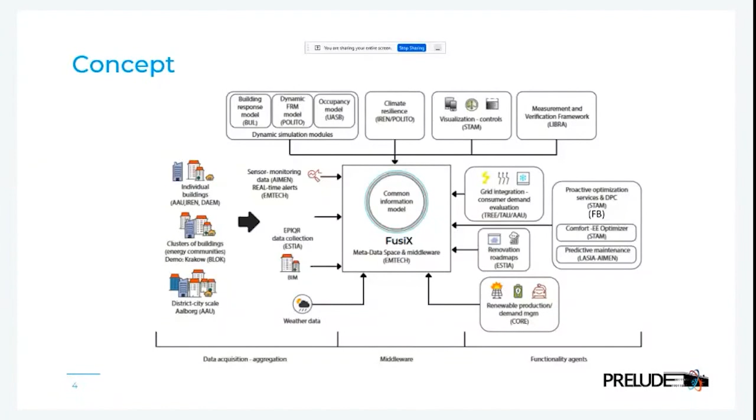Today, the focus area is on proactiveness, forecasting, and optimization. And as Giacomo has said, we will hear 5 exciting presentations. One of them will come from POLITO, which will be about white box models, the free running concept for the building, and 24-hour forecasting of comfort condition in the building that is supported by these models. The other presentation will be given by Treelogic, which is about aggregation of the data and upscaling of the models.

The third presentation will be given, maybe not in that order, by STAM, which is about their platform and concept for energy efficiency improvement in buildings, big savings, and also one from Forschung Burgenland, which will focus on data predictive control of buildings. And then one more presentation will be given by CORE, which is working on prediction of weather conditions and also energy balance condition in the building. I think I have captured all of the presentations that will be given here.

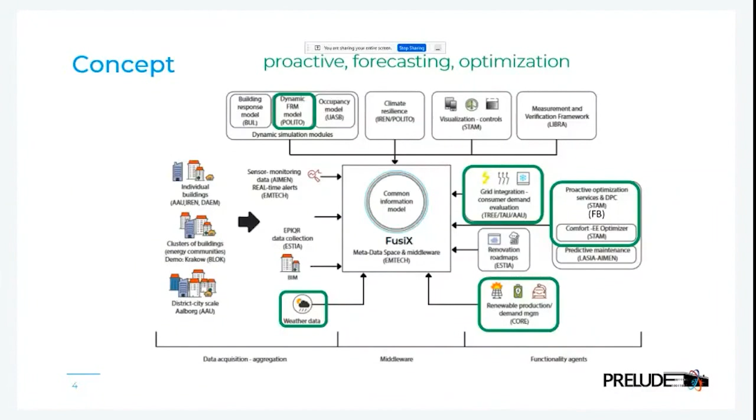This is not very efficient, and this is maybe not the favorite situation for the building owner or the tenant, where you have several technology providers every time separately contacting the building.

Therefore, in our project, we have replaced this configuration with a central solution for the middleware, which is called FusiX, which can serve a data transfer between the building and different technology providers, and is bridging the data from one to another. It can also bridge the data from one technology provider to another, so the data is more easily accessible by each partner in the project.

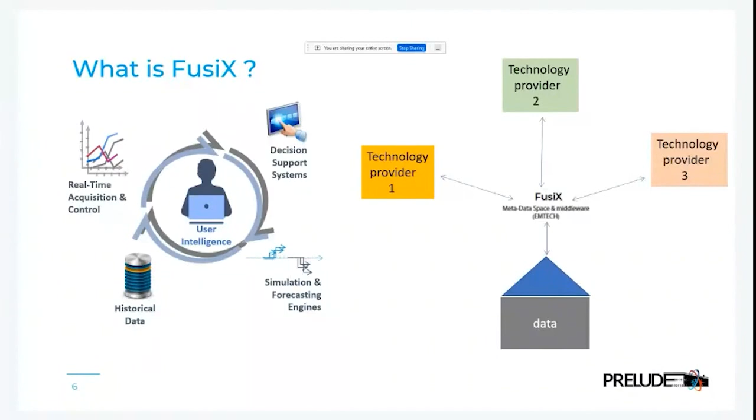On top of that, FusiX not only acts as a middleware, it can also aggregate data from various technological level buildings. It can integrate simulation and forecasting technologies. So this means it can integrate all of these technology providers that provide this kind of solution. Generally, it can enhance intelligence. In some cases, it can schedule and run simulations.

And it can as well provide the feedback in form of some kind of dashboards and proactive graphical interfaces to the end users. It can also control the signals to the building if the building allows that communication.

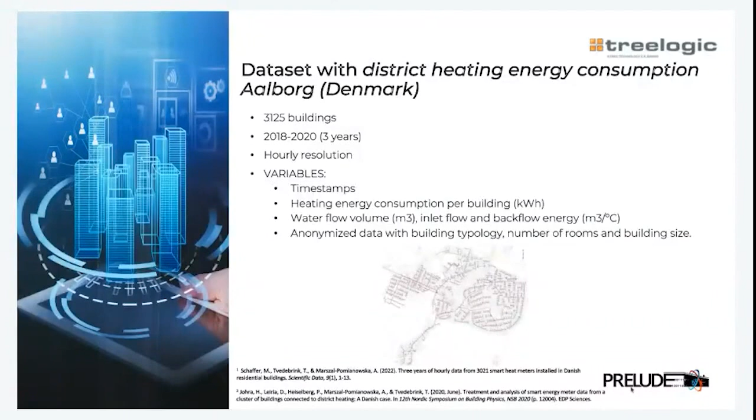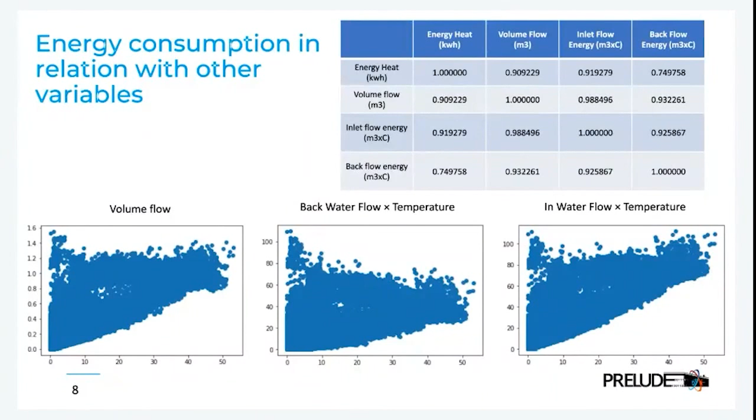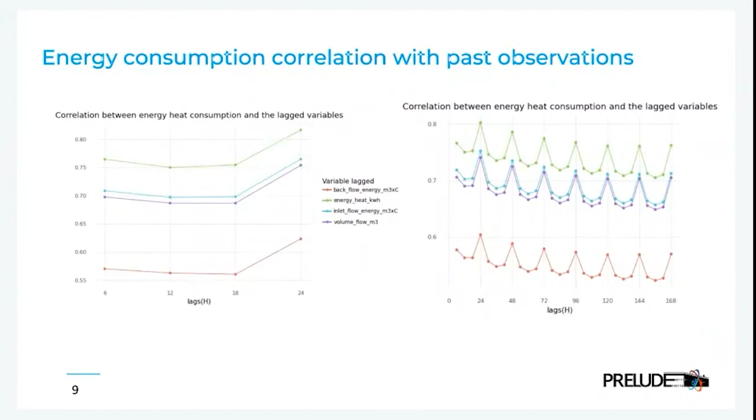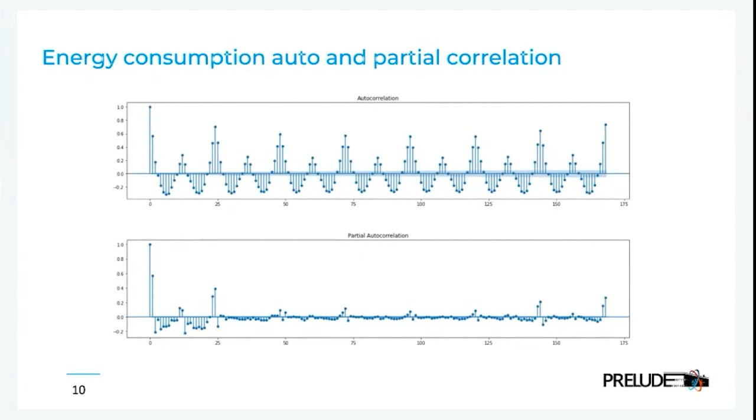In my opinion, it's also important to highlight the technologies that we are using here to perform either the exploratory data analysis or to train and test our forecasting models. We are mainly relying on Python as a programming language, and we are not limited only to these three important libraries that we are using: sklearn, XGBoost, and HyperOpt.

We are also using AWS, Amazon Web Services, such as S3 for storage and SageMaker for the notebooks, and Elastic Compute Cloud or EC2 service in order to instantiate and make the forecasting. As it's an ongoing work, we will potentially be using Spark and Elastic MapReduce to have a faster response from the models.

And now, before diving deep into the aggregation methods details, let's set our baseline model. For the baseline model, we chose a monolithic model for district level forecasting. We'll be using the Aalborg dataset that we presented before, and the idea here is to make a model whose output will be a 24 hours ahead forecast of the district heating energy consumption, and it will use as input the variables that we have mentioned before, of course after performing a feature selection process.

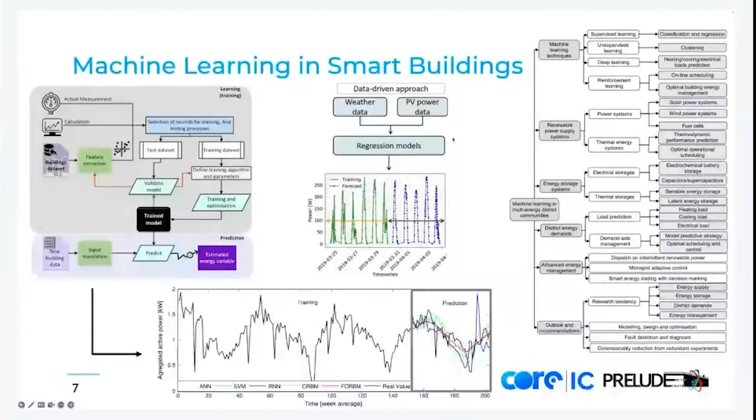Okay, so in more detail about the PRELUDE project, we acquired some data from the Living Lab Energetikum, which is located in Pinkafeld in Austria. The available data for good modeling till now is about 1 year, with a resolution of 15 minutes. The sampling frequency of the time series is 15 minutes.

And before modeling, we have implemented a data pre-processing procedure where we clean the data, removed the missing values or values that are not reasonable, and then also we excluded some outliers of the data, etc. Also, we resampled the data to hourly resolution because our goal is to make a forecast 24 hours ahead, for example, for the weather data or for the energy consumption and PV power generation.

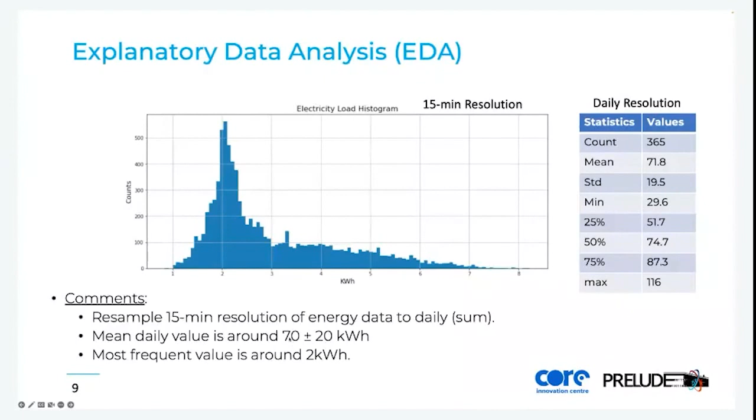So here you can see a histogram of electricity with the 15 minutes resolution, where you can see the peak around 2 kilowatt hours, which is the most frequent value. And also the mean daily total value, which is not depicted here, is about 70 plus minus 20 kilowatt hours.

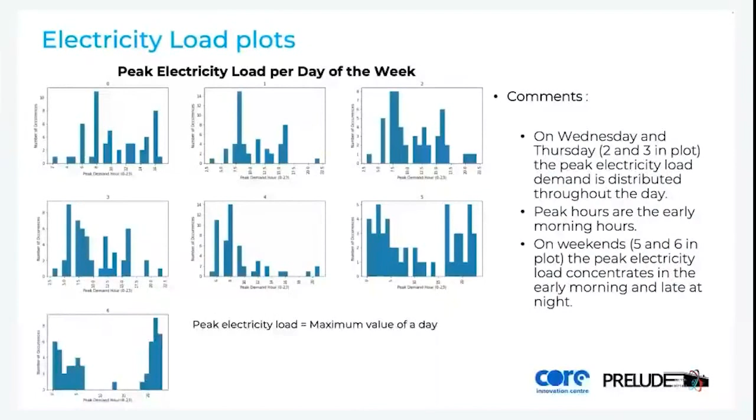Also here about the peak electricity load per day of the week, you can see that for all days there is no specific pattern during the day, so this may be a difficulty for us to make some predictions in the future. Also, you can see here per month, from which we can conclude the same, meaning that the month is not playing a very crucial role in the forecasting of the electricity consumption, because during the year the building is used equally.

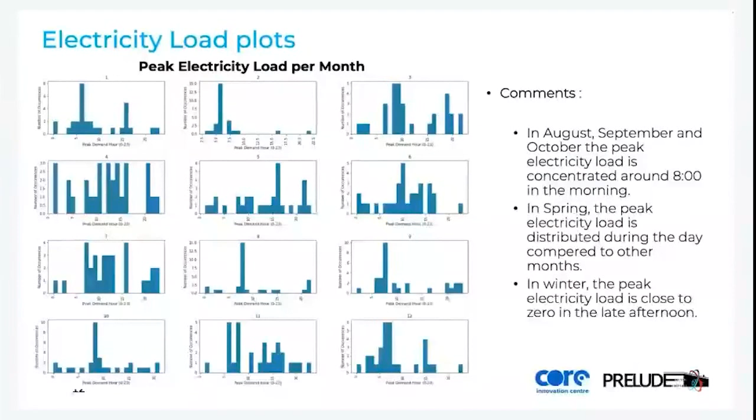So here, for the data about the production of electricity, we have an example of 3 months of the production of electricity from photovoltaics and the global radiation. The key here is that the variable that drives and helps to forecast the production of electricity in a 24-hour horizon is the global radiation, which is very obvious here because this is the variable that produces the electricity.

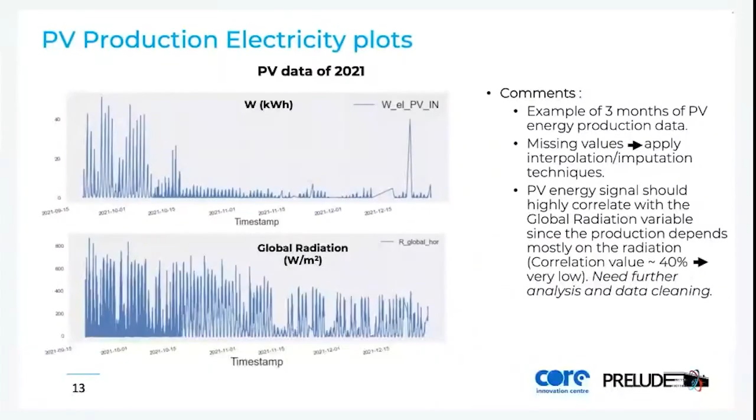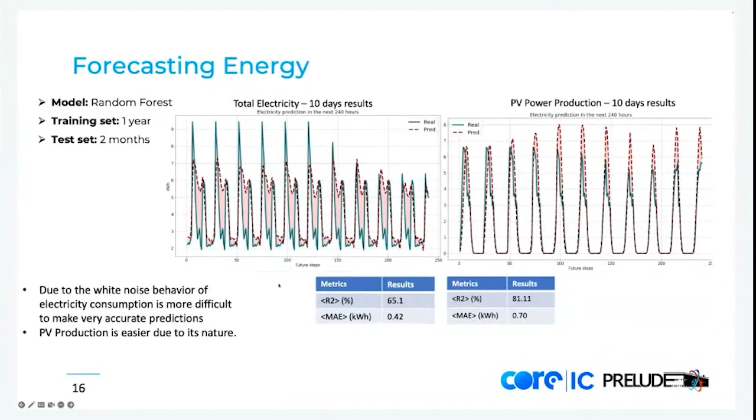But here, this result may be misleading. The crucial part is the mean absolute error for both variables, where on average we achieved about 0.7 kilowatt hours mean absolute error, and in the case of electricity consumption about 0.4 kilowatt hours for a test set of 2 months. So that's all for our part in the forecasting models in the PRELUDE project.

So some conclusions from this presentation are that machine learning algorithms are the most contemporary way of time series forecasting. Also, there is a plethora of applications, as you maybe already know or saw today, in the energy sector. One part of this is the forecasting of energy consumption and PV generation. Also, the manipulation and processing of time series can be quite challenging because most of the time the nature of a time series can reveal the power of predictability, as you can see in the case of electricity consumption, which was white noise, and this includes randomness in the time series.

And finally, the main challenge to deal with in time series is the forecasting horizon. So the longer the horizon, the more difficult it is to make accurate predictions for the ML models. So I think this is what you should keep.

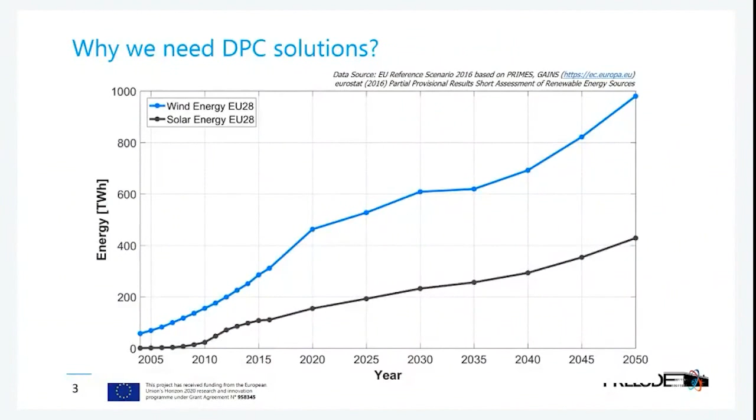If we talk about our energy strategy in the European Union, we have a cascaded utilization of activities. In the first step, energy saving, of course. In the second step, the direct use of electricity, especially from PV and wind energy. So in the future we have a more volatile energy supply system based on PV plants and wind power plants. For these reasons, we need a more intelligent control strategy on the demand side, offering more demand side flexibility from the user side.

We also have to offer flexibility so that we have a more grid-friendly operation, so that the grid will have a better solution for the future. For these reasons, we have to develop intelligent sector coupling technology. That means we should use more electricity, especially for e-mobility, and of course for power to heat and power to cool solutions.

The main advantage is that all this technology is available at the moment. We don't have to wait; batteries are available, heat pumps are available. We have the solutions for communication and for sensors. We only have to put it all together in an intelligent way so that we can align the energy production to the demand side. And this is where data-driven predictive control can especially help us.

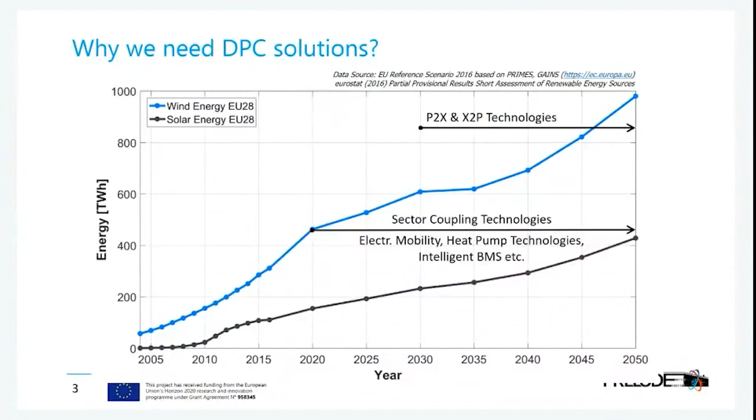What are the main advantages of a DPC, a data predictive control algorithm? With a data predictive control algorithm, we have the possibility to do peak shaving and load shifting. That means we can, for example, also ensure a power limit. We also have the possibility to optimize the runtime or the turn-off time.

We also have the possibility to better exploit solar gains. For example, if we not only use the DPC controller for the heat pump or for the charging control of the batteries, but also for an active shading system, then we can use the solar gains directly for heating, so that we can avoid additional heating energy demand during the transition period between winter and summer. This is also a really, really important topic.

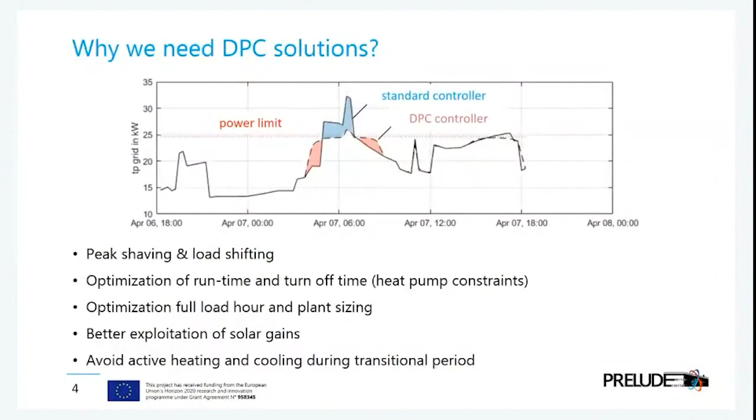And the question is, how does it work and how can we construct a DPC solution? Here it is really important to understand what state space modeling is, and on the other side, how we can optimize the future trajectories of the different actuators which we can control. For example, the switch on-off situation of a heat pump or the change of the hydraulic valves, etc. And for these reasons, I would like to start with a first step. What is a data-driven state space model?

We need a model which is able to predict, for example, if we apply the DPC controller for a zone, the room temperature. We know if we have a building, then the room temperature depends on the energy which we feed in via heating in a zone, in a room, but the temperature in a room is also dependent on the inner loads. For example, if we have a lot of PCs, then of course the inner load also increases the temperature level in the rooms. Then we also have inner loads from the occupants. Everyone gives off about 80 watts when sitting. So we also have an increase of the temperature based on these inner loads from occupants.

Then we also have solar radiation, solar gains, which heat up the rooms, especially over the summer months. And for these reasons, in a state space model we have to analyze not only the energy which we feed in by heating, or which we extract by cooling over the summer season, we also have to consider all the different loads which can occur, especially the solar loads if we use large glass fronts in our building. And especially if we have a lot of people in a building, then we also have to include the heat production by the occupants. This is the one side.

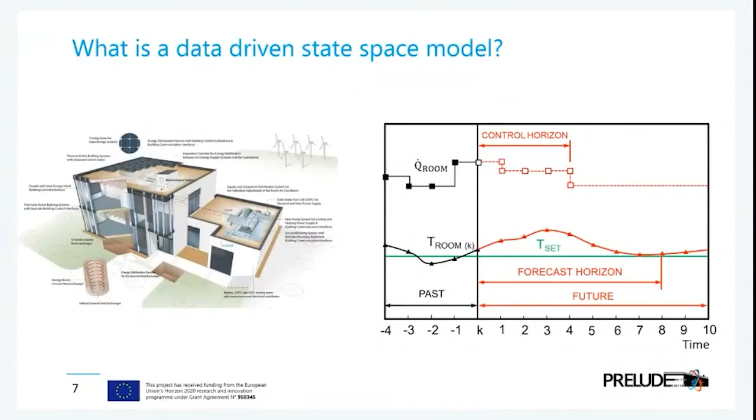That means we need, in a first step, a model which is able to predict the room temperature in dependence of all these additional boundary conditions, and with consideration of the future development of the weather condition, of course, also with the future development of the occupancy. So we need also occupancy modeling so that we know in the next 24 hours, for example, how many people are in the room, are in the building, etc.

And what we have also to analyze is, on the one side, as I mentioned before, to modify, to adapt, to adjust the energy consumption in such a way that we can better integrate renewables, but also we have to consider the room temperature in such way that we can offer with the building optimal thermal comfort.

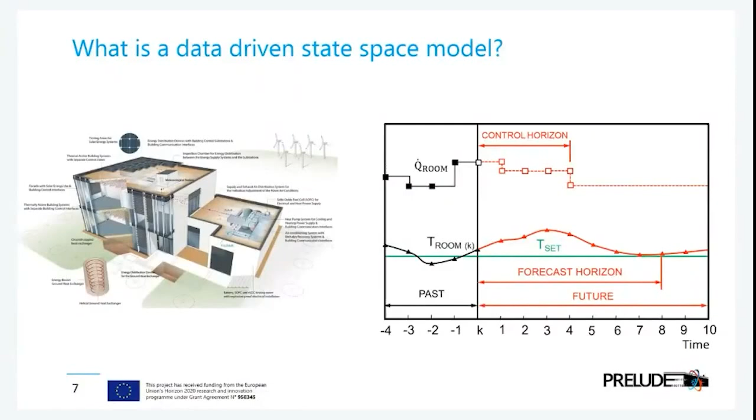So that means the state space model offers us connectivity between the energy which I feed in a building with future trajectories, and on the other side we receive information how, based on this energy which we feed in the different zones, the room temperature will change. But there are a lot of different possibilities how we can derive such a state space model.

We can use, for example, a black box model. It's a full machine learning algorithm. We can also use a white box model. That means we use a building simulation system and the building simulation model, and based on the building physics information and the weather data, we can also simulate the thermodynamical behavior of a building. But there is also a possibility between both approaches, and this approach is called gray box model.

The gray box model is a mixture between a physical model and a data-driven approach, and this gray box model is generally based on the first law of thermodynamics. So that means we can use the first law of thermodynamics, and based on it, we can derive, based on different model structures, a state space model.

And in a first step, it is really important to analyze which building we have. For example, if we have a building with a large glazed facade, then we have also to consider in the model structure the solar gains, the solar loads. If we have a building with a ventilation system, then we have also to include the energy feed in and extraction by the ventilation system. If we have a building with a lot of people in there, then we have also to consider the inner loads based on the occupants, etc.

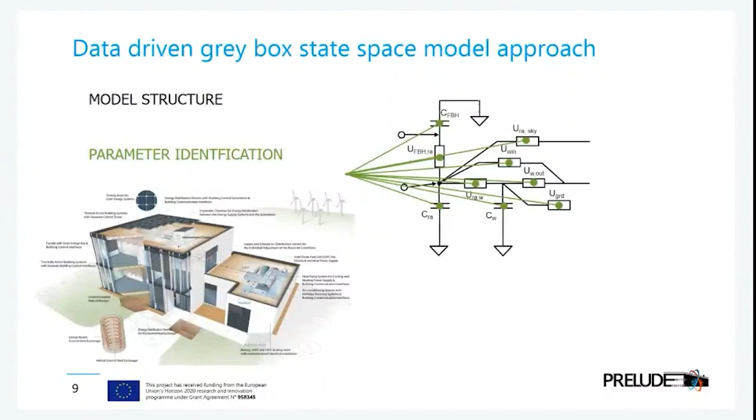But really important is we should use here a model structure which is based on a linear ODE. The main advantage is, based on the linear ODE, we have the possibility to discretize this ODE in such a way that we receive a linear set of equations.

And then we can derive, based on this linear set of equations, the constants, the matrix constants, in such way that we can better integrate it in the optimization algorithm. Of course, there are two possibilities.

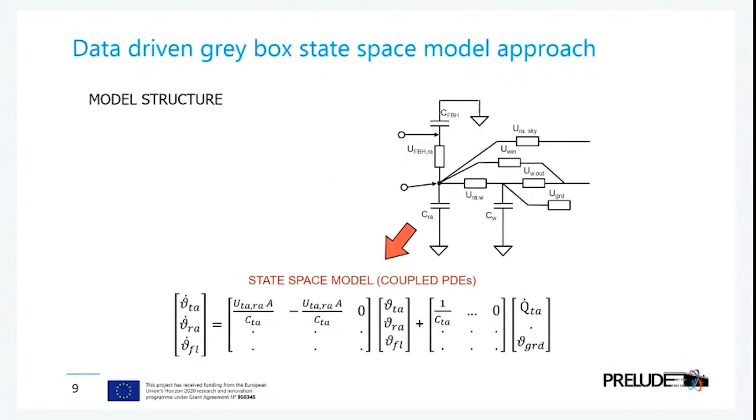We can use the standard state space model discretization, but if we use a standard approach, then we receive nonlinear equations, for example, if we consider the solar loads, etc. And then we can only use nonlinear optimization algorithm.

And if we would like to optimize a lot of different trajectories for the actuators, for the valves, for example, for the shading position, etc., then we have a big issue, because nonlinear optimization algorithms have problems here to find the global minimum.

For these reasons, we use here source terms, which include in an explicit manner the nonlinear terms, for example, the solar loads, etc. And then you can derive here a set of linear equations. And this is a really, really good basis for the optimization algorithm and to apply, for example, a solver-based optimization.

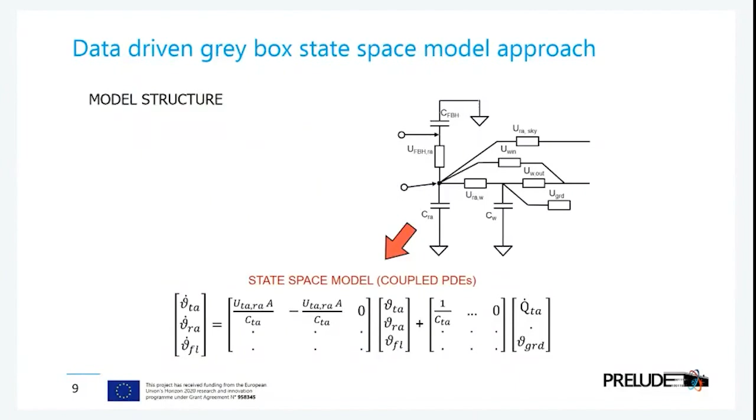So if we have this state space model, then we can put it together with the mentioned optimization algorithm in such way that we can construct a DPC controller. In a first step, as I mentioned before, it is really important to analyze the building in which we would like to integrate a DPC controller in such way that we analyze what we would like to control.

Is it only the heat pump switch on and off, or is it the heat pump? Is it also the different zones? Is it also the shading system, the position of the shading? Also, for example, the angle of the slats, etc. This is a first step.

Then we have to analyze, are the data, the position of the shading, for example, also the condition of the heat pump, etc., available in the building automation system, or should we also include additional sensors, for example, IoT sensors? Then we can derive, based on this information, the state space model, which includes, if we have a large glazed facade, also the solar load behaviors, etc.

And if you have, for example, a concrete core activation, a thermally activated system solution, then we have also to include additional capacities, etc. Depending on the situation, we have derived this model structure, and then we can use the historical data to identify the parameters so that we receive the thermal resistance, the thermal capacities of the different elements in the model structure.

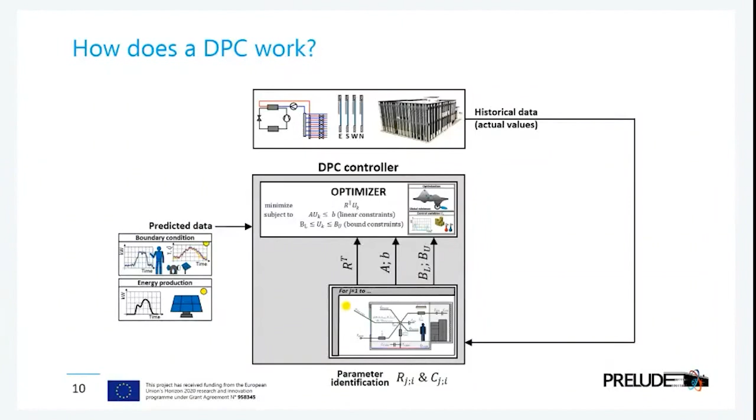For example, based on machine learning algorithms, it is possible to predict the behavior of the occupants. That means how much ventilation or air exchange rates we need in the next 24 hours, etc. This can be also predicted, and this will be also fed in as a boundary condition, of course, for the optimizer. And then we have also to consider the thermal comfort constraints and also the objective function.

So we can use here, for example, comfort constraints regarding the lower temperature level and the upper temperature level. The temperature band can be directly derived by user feedback or can be directly given by the building manager.

Regarding the objective function, we can use different objectives. We can optimize the self-consumption if we have PV panels implemented. We can optimize grid flexibility. We can optimize, for example, the operation of the heat pump so that we minimize the maintenance costs. We can optimize, for example, also the energy price. So if we have time-dependent energy prices, we can also use this for the optimization function.

We can also use, for example, carbon dioxide as the optimization goal so that we minimize the carbon dioxide footprint. So this is really simple to change, depending on the general goal of the building, of the operator. We can use different objective functions. And then, based on the optimization, we receive the control inputs for the next 24 hours. And based on these control inputs, we control for the next 24 hours the heat pump, the valves for the hydraulic system, the positioning of the shading system, etc.

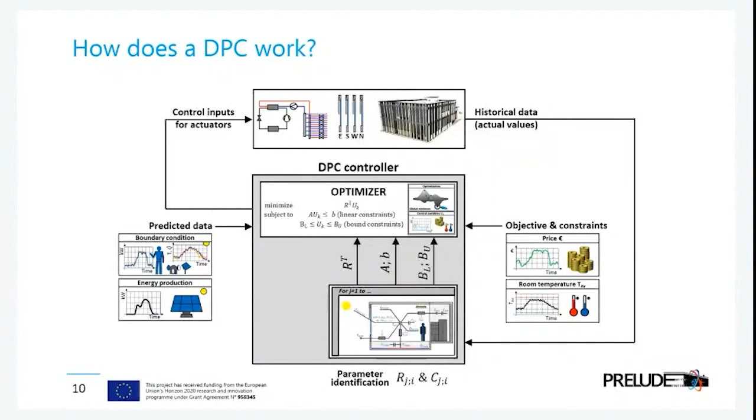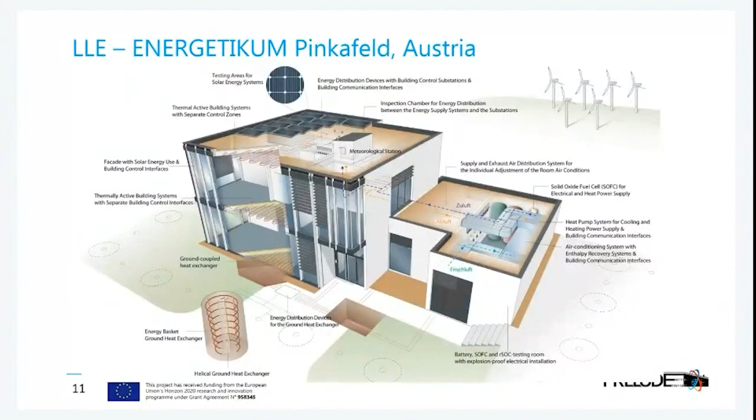Okay, we have applied this solution in our Living Lab Energetikum as a pre-pilot in the PRELUDE project, so that we can learn how we can implement such a solution in a building, how we can optimize such a solution, and also how we can derive this high-tech solution for low-tech buildings. This is really important also for the PRELUDE project, so that we can consider all bands which we have in practical use. Here you can see the picture of our Living Lab environment.

It's a real building, it's really used. We also have, of course, feedback from the users. We have a really critical building. This is the most critical way you can have. We have a glazed facade, a fully glazed facade. We have a shading system. We have concrete core activation. We also have a floor heating system. That means we don't have a classical radiator. We have systems which have a high thermal inertia.

So on the one side, we have a really quick change of the disturbance of the solar loads, for example, and on the other side, we have a really low speed heating supply system with high thermal inertia. And this is the most critical situation which you can have. And if the system solution works for this critical situation, then of course you can use it for other, simpler buildings.

How can we implement such a DPC solution? As mentioned before, we need historical data so that we can parameterize our state space model, and then we also need weather prediction, forecast data, so that we can apply our optimization algorithm. We derived a concept which is also scalable, based on an open communication platform. That means we use a building automation communication network. The BACnet system is open.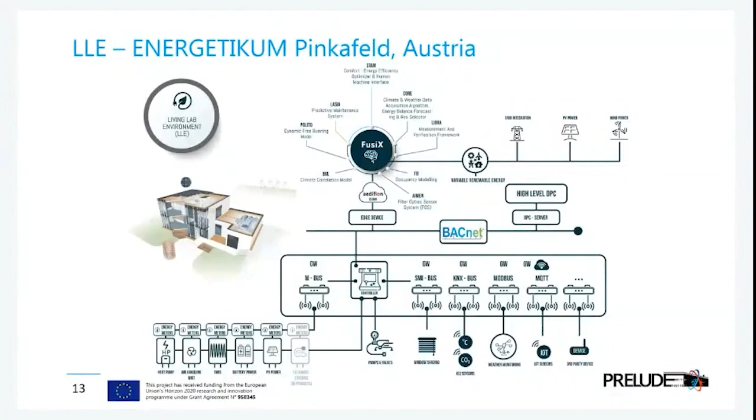That means with a really simple linear gray box state-space model, which is data-driven developed, we can really well forecast and determine the behavior of the room temperature, in dependence of the solar loads, in dependence of the inner loads, in dependence of the occupants, etc.

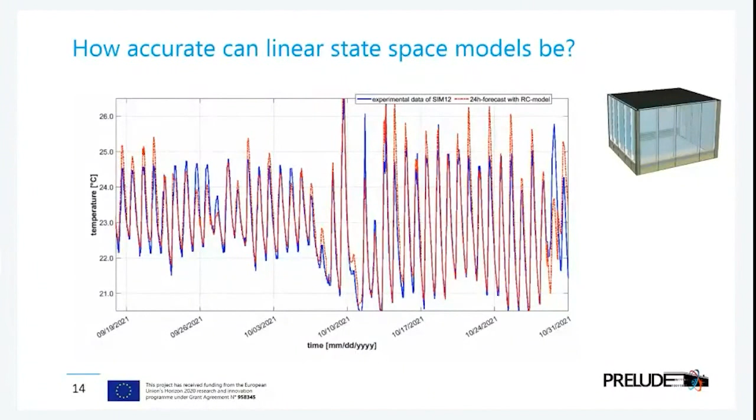And we have, of course, also implemented this in our living lab in such a way that we can analyze the energy saving potentials. And here are only some extractions of our intermediate results, for example, for the cooling energy, so that you can get a better feeling of how much energy we can save, especially for the cooling case. Of course, with our living lab ENERGETIKUM we have a building with a glass front, so the solar gains and the solar loads for the cooling case play a really important role.

And of course, we also have a full ventilation system with a cooling coil for dehumidification. And if we optimize all these aspects with the DPC algorithm, that means, for example, if we know that the sun is really shining in the next 24 hours, then we control the shading system in such a way that we avoid overheating in the room, so that we really need only low energy amounts for cooling, etc. Then we can dramatically reduce the energy consumption.

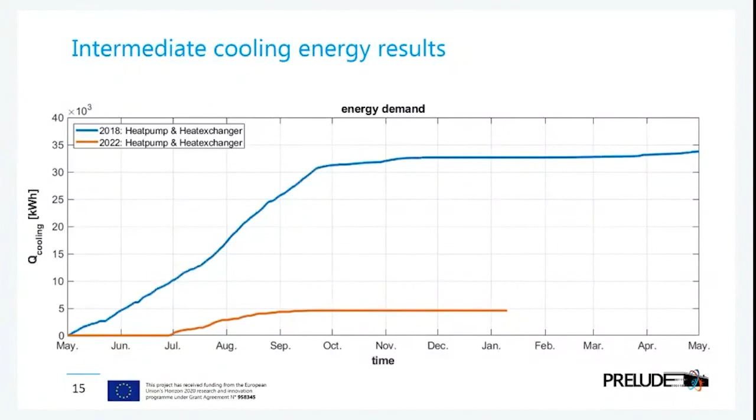Also, we can see that for the heating case we have reached a really good reduction of the energy consumption. Of course, not so much, because we cannot change the U value, the thermal insulation behavior of the building envelope, with an intelligent control algorithm. This is not possible. But what we can avoid is too much energy consumption, especially in the transition period between winter and summer.

Here we have the possibility to use the solar gains for cooler transition periods based on the intelligent control of the shading, and on the other side we can also avoid additional heating energies which we need for the dehumidification, because here we also use an after heater. And if we don't need the after heater, because the DPC can also predict the temperature increase in the distribution pipes, etc., then we can also avoid this energy.

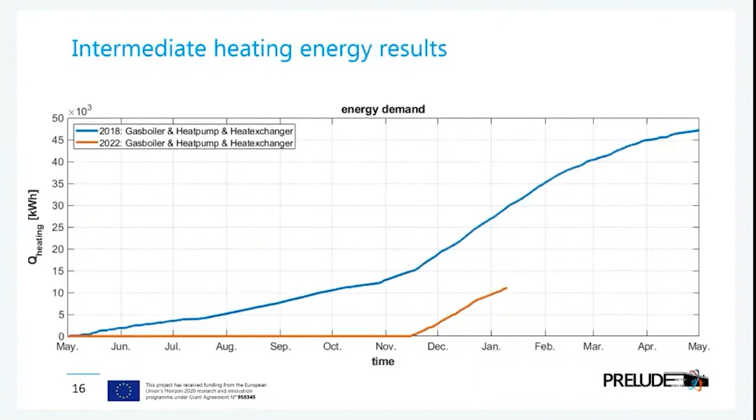And for these reasons, we can also expect results from the long-term test. The one-year test is not finished, but what we can see here, we can expect that we also have a really huge amount of energy saving potential for heating. And another really important advantage is that we can also optimize the integration of PV. So that means self-consumption is also optimized here.

So now I'm at the end of the presentation. What are the next steps regarding the DPC controller? Of course, we will finish the long-term test. I think by the end of May we will have finished the long-term test with the high-end DPC controller. Then we can also give you the information about the energy saving potential of the entire year.

We would also like to analyze how we can apply it, and what the potentials of such a solution are for other objectives, especially for energy costs optimization and carbon dioxide minimization. Then we will also do some tests regarding load shift and peak reduction. Here we also have interim results, so we can, for example, say for the cooling case, we have reduced the peak loads from about 30 kilowatts to 5-6 kilowatts. It's also a huge amount.

Then it was also able to replace the gas boiler. In 2018 we used the gas boiler for heating, because the ground heat exchanger was too small sized. But with this DPC controller, we can use the ground heat exchanger and apply the heat pump solution for heating, and we don't need the gas boiler at the moment. So here we have also optimized the usage of renewable energy, and replaced the fossil fuel gas boiler system solution.

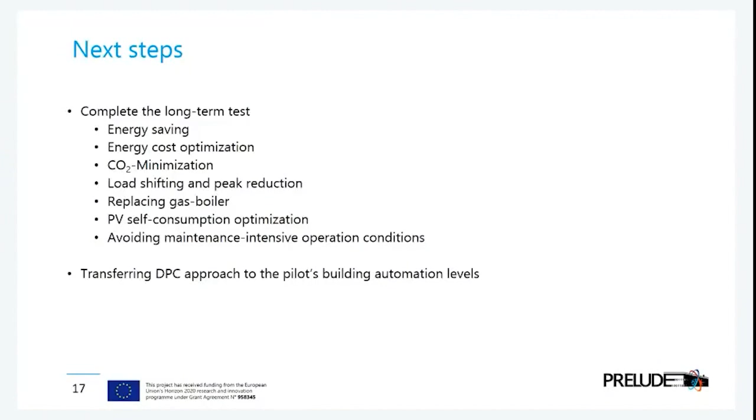We will have two last presentations, the one from POLITO and the one from STAM. In this one from POLITO, we will shortly look inside some basic functionalities of the new platform for building white box modeling using EnergyPlus. But mainly we will focus on one of the user scenarios, which is the 24-hour forecasting.

It's true that white box modeling is potentially not the best strategy to support optimization, because, as we will see in the limitations of what we present today, it requires a long time of running and elaboration and so on. But what we are testing here is to push these possibilities as much as possible, and identify and clarify the limitations better. In addition, it's also possible, and we hope to do it in the next months, to pass part of this optimization from fully white box to gray box or surrogate modeling. The presentation is done by me and by engineer Paolo Grasso from our group.

So let's talk about PREDYCE. PREDYCE is a Python library or Python tool developed by Politecnico di Torino. In its base form, it allows different things. For example, the parallel running of EnergyPlus simulations, the editing of the building models, so the IDF files, and the analysis and computing of key performance indicators on both simulated data or monitored data.

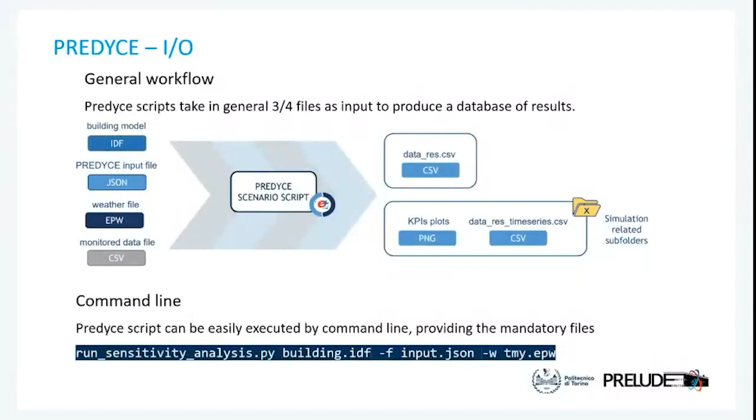Okay, this is an example. Supposing we are doing a sensitivity analysis, the runner module creates a different combination of the actions with the parameters that we want to optimize.

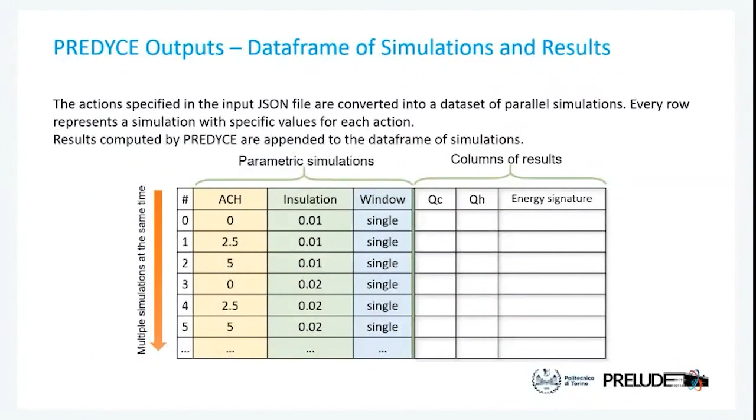Okay, so PREDYCE supports different scenarios like sensitivity analysis, a support to model calibration, which is semi-manual, but it can speed up calibration of a model by a lot. We can compare simulated data with monitored data. So after running a simulation, if monitored data are provided, we can compute the KPIs also on monitored ones. And we can support 24-hour forecast, a scenario that we will explain in a while.

Potential things to be included are the climate change analysis and resilience, which will include the Copernicus ERA5 dataset. We could include some optimization algorithms inside the scenarios like sensitivity analysis and 24-hour forecast to speed up the computation time, and also potentially a surrogate model to simulate in an alternate way and speed up computation time even more for some demanding scenarios.

Now we will explain the 24-hour forecast, which is a scenario that exploits the forecast weather data to predict the best component behaviors of a building to maximize the thermal comfort. Components that can be optimized include the ventilation, which can be mechanical or natural, and also shading with its activation and slat angle.

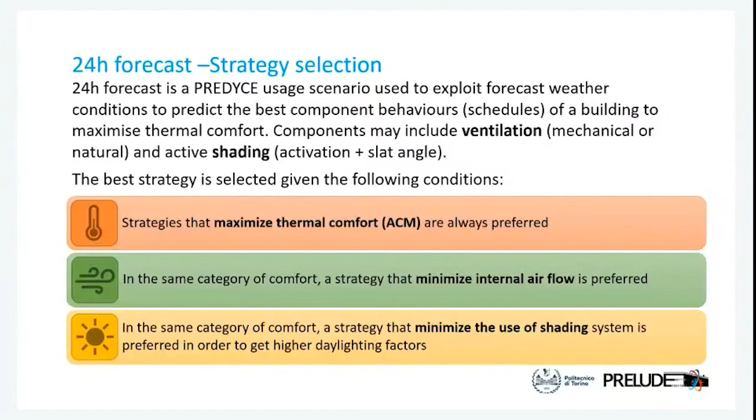This is the general workflow. So we have the IDF model, the building model, and the weather file as input files. The weather file is composed by the EPW compiler, and it is made of historical data downloadable via internet or weather stations, and a part of forecast data which can be retrieved by online databases, for example, MeteoBlue.

So we have this hybrid weather file, and if we feed our PREDYCE script with these files, the PREDYCE script will start creating the 24-hour forecast schedule. So based on division in blocks, we try different strategies for every block of hours. So for example, in the morning, we try combinations of ventilation and shading. Then we try at noon, and then in the afternoon.

And during this analysis, we compute the thermal comfort with the adaptive comfort model for the entire day. And we select the strategy that fits our model the best. So by repeating this for every part of the day, we finally assemble a final schedule which should be the optimal one. Now I can leave the floor to Giacomo again.

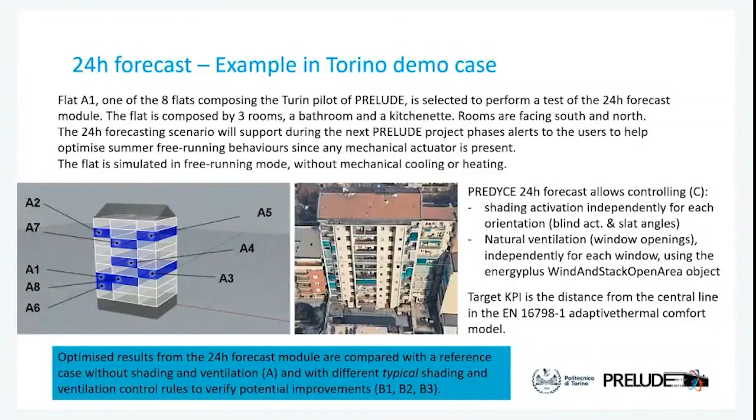I want only to remind that this type of building in which we are working is without actuators. So all the things that we will do is a way to suggest to people, thanks to alerts, actions that they can perform. So also when we compare the different scenarios, even the best one that we had identified without the 24-hour forecast, the one based on fixed shading and strategies that work for this period, is not potentially the thing that people do.

It's better, and potentially even easier, that they follow a suggestion like the 24-hour forecasting suggestion that is not based on the fact that each day they remind at 11 to open. So that's the result of a different scenario.

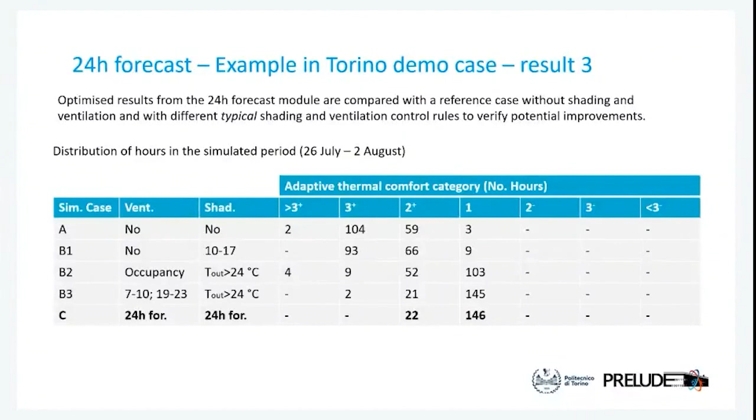Clearly, if you expect to extend to the whole period, it takes time to run the simulation. Over the whole period, this type of optimization, the 24-hour forecast, has the potential to be even better than the others, because clearly the B3 is optimized manually to work as much as possible for this specific period. If extended, it will not be like that. If you plot it on the typical adaptive thermal comfort plot, we see that the 24-hour forecast scenario brings the discomfort to comfort.

So to conclude, what we can say is that clearly the 24-hour forecasting model looks to work. Which are the limitations? Calculation time: we use a server, a medium-dimension server, to run the simulation, because clearly to optimize it we run, I don't know, 10,000, a lot of simulations, okay? In a white box model using EnergyPlus, so these are simulations that take some time to run. And the students present know, they worked on that.

A number of forecasted weather variables are required to feed this type of white box model. So we don't only need irradiation and temperature, we need more. And so we need to have, for example, external services for that, like Meteoblue and things. We have already done the connection to them, but clearly that requires extra data. In addition to that, in self-actuation, the results that we have with the simulation may not perform perfectly in real conditions, because we will have the performance gap due to manual actuation.

The next step planned is the implementation of it in the Turin demo cases, with a better implementation in the flat, to test the performance and send the alerts to the people. To finalize the long-term test in the FB Living Lab, because we already started testing it and it looks to be working, but clearly we now need to do a test in summer conditions. And also we need to do the same that we are doing for Turin in the Aarhus demo cases. We will potentially compare the results with other strategies, including the correlation model in PRELUDE, at least under simulation, and also with a typical control strategy like done today, an optimizer for the building itself.

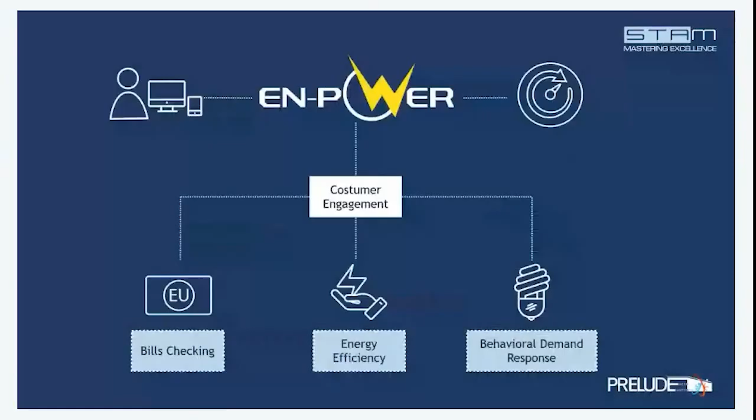We are working on it. At the moment, it's based just on data input, but we are trying to extend it so that it uses OCR to read from actual PDF documents and from invoices, so we can get the data and then work with that. Then we have the energy efficiency model and the behavioral demand response model service. Sorry. Everything, however, starts with a dashboard, because when we talk about data, we talk about models, we need to find a way to present this to users that do not have any idea of what we're talking about, pretty much. So this is what the dashboard looks like at the moment.

So we have a few graphs that give out the information on the costs, so how much we're spending on energy, how much we are consuming, what's the difference between the current month and the past month, and also what are the appliances that are withdrawing energy, and what is the energy intensity, which is a good way to compare different households, different offices, because obviously it divides it by square feet, so it gives you a unique KPI that allows you to compare the different things. And then the carbon footprint is just a way to convert the energy saved into CO2, and so see how well you're doing in this scenario.

I'm going really fast because there are other things, but the main idea here, regardless of what kind of graphs you're showing, is you need to translate the information, the data that you have that comes from IoT, into a way that people can consume it. So this is quite straightforward, but it's really, really helpful because in the end, you're not going to be able to deliver value if people do not understand what you're doing. So how do we do this? Again, really, really fast.

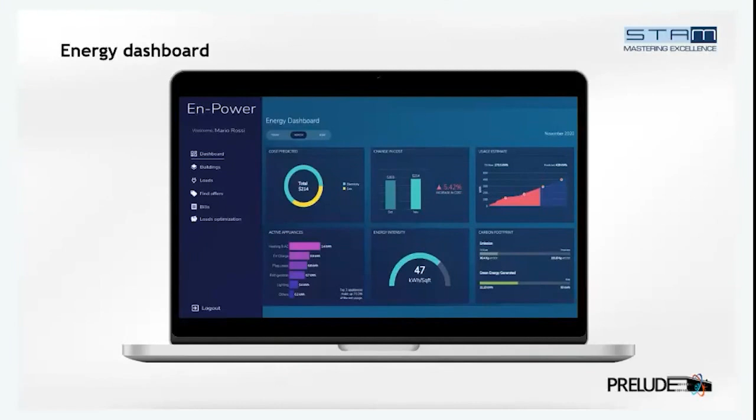To do this, we need obviously IoT data, but we also need to map what we call the digital twin. So we need to know what this data refers to in terms of physical assets. So we need to know how a building is made, how many rooms it has, what are the appliances that are contained, what are the sensors that measure a specific value for these appliances.

For example, if you have a washing machine, you may have tons of sensors. You can measure energy, power, vibrations, anything that comes to your mind. So things get really, really complicated really, really fast. So you need to have a way to store all this information, and you need a way to put this together effortlessly. Because if you don't do this, then all the complexity just keeps on getting higher and higher as you ingest more and more data.

I mean, there's no way of turning off the TV when somebody's watching. There's no way of telling somebody to not use the oven because it's dinner time. So you may give some insights, but in the end, there's only so much you can do for certain things. For others, such as heating, usually you have a lot more flexibility. And this is something you need to work on with the users. So a way to do this is to ask them what they're willing to sacrifice to gain flexibility.

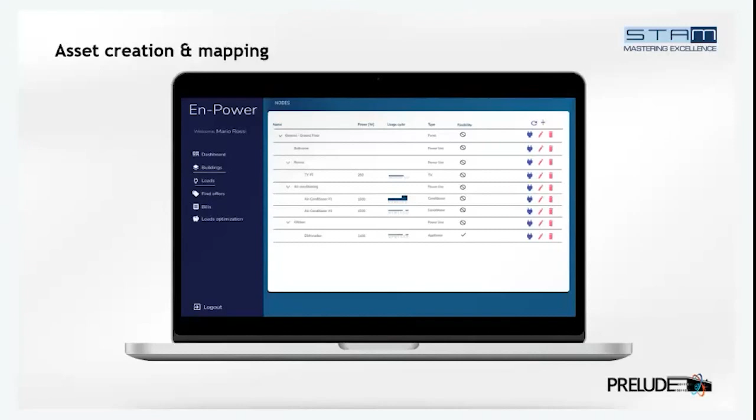So we're coming to the heart of the platform, and this is where the PRELUDE project really comes in, because one of the main components of the platform is the load optimization. So feeding in all the data that you've seen before, so all the loads, feeding in IoT data, so energy consumption, and not only that, temperature, environmental data, air quality data as well, we are able to provide a forecasted optimization for the next 7 days.

So we're able to tell the user how he should manage his loads in order to achieve some kind of results. And what are the results? We'll talk about this in a minute. But keeping our heads just for one more second on the graphic user interface, first of all, we have information on how much money you're saving, which is crucial because it's one of the biggest levers you have with users.

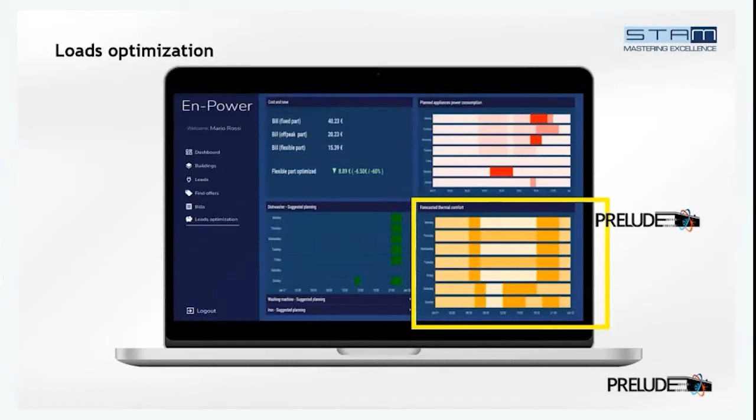Because, for example, if we have data about occupancy, we don't need to maintain thermal comfort if nobody is in the room or nobody's in the apartment. So there are really a lot of things that come into play, and a lot of data. Again, our efforts are to visualize them in the best way possible.

So now we're going to deep dive a little bit into the algorithms that we're developing. A lot of things have already been said, so I hope this links everything together. I'll just go on for a little bit, and then I'll leave the word to Lorenzo, who will describe the technicalities. But the idea is this: we have a bunch of inputs being either measured or forecasted. So we have the consumption forecast, the occupancy forecast, PV generation forecast, and environmental forecast, which is pretty much weather. We have a set of constraints.

We have technical constraints, for example, the maximum power that we can get from the grid. We have economical constraints, so the different ranges and tariffs that vary throughout the day. We have comfort constraints, so we know that we need to keep the temperature within a set range for a particular time, or we need to control the humidity or air quality. And everything is thrown at the optimizer, which in the end gives us an optimized schedule for the next 7 days. So how do we do this?

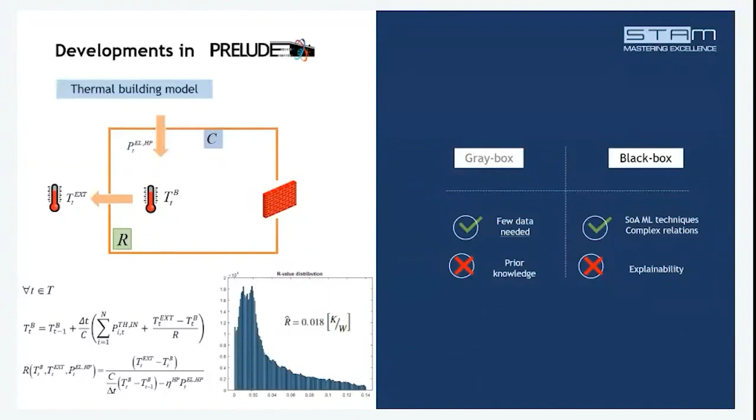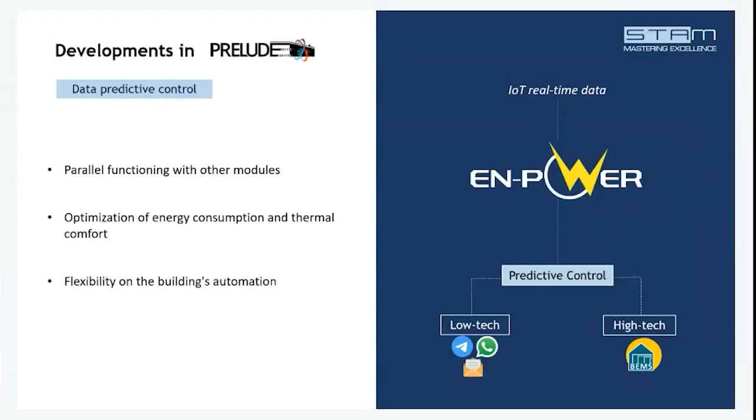Thank you for all the presentations, they were really interesting. I would like to ask something more related to the implementation part, the part related to asking citizens to implement your technologies. What were the main difficulties you found in asking people whether they are going to implement this technology, because we would control your scheduling system, maybe your ventilation and all of this?

And I think that the oldest people in Italy, for sure, maybe are not really interested in it. So I would like to ask what were your strategies in proposing this new technology. Thank you.

If I can add something, because as well as the task that you've seen in the presentation, we're also supporting the Turin demo site. There is even a step before that: you need to convince people to provide data. It's really complicated because you need to do that in a way that doesn't impact their lifestyle, so from the data point of view it needs to be absolutely transparent. If it has an impact, it's already a big barrier that you need to push through.